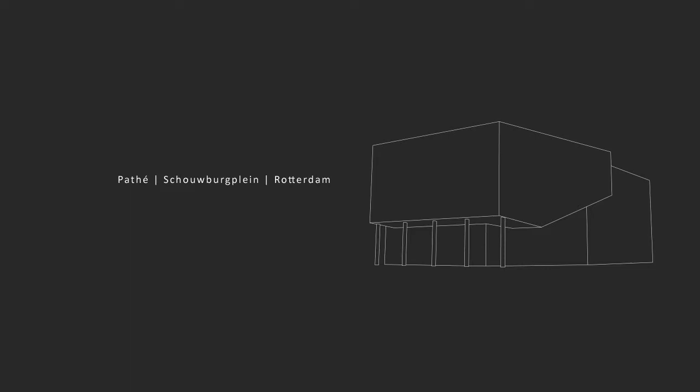The building we have chosen is the Pathe Schouwburgplein cinema building, situated in the heart of Rotterdam. The building is surrounded by the large square named Schouwburgplein and has been a unique landmark ever since its opening in 1996.

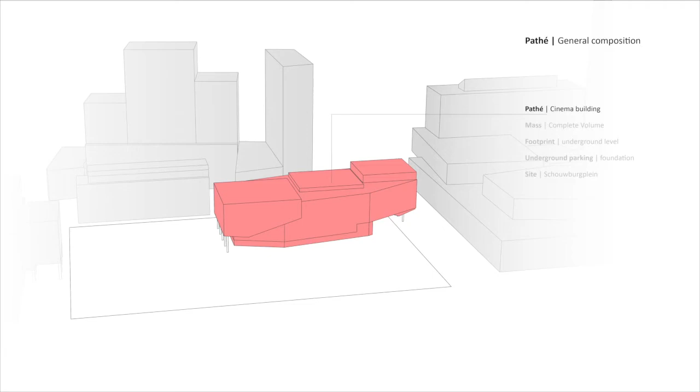Under the entire square and the building there is a parking garage. The building is placed on top of this parking garage, therefore it has been constructed lightweight. The building is composed of a set of large boxes, in which the cinema halls are positioned. These boxes are well insulated and they are standing on a grid of columns.

The envelope is made of translucent PVC panels. It encloses a foyer, which is a large open space connecting the cinema halls. The foyer is a different climate zone.

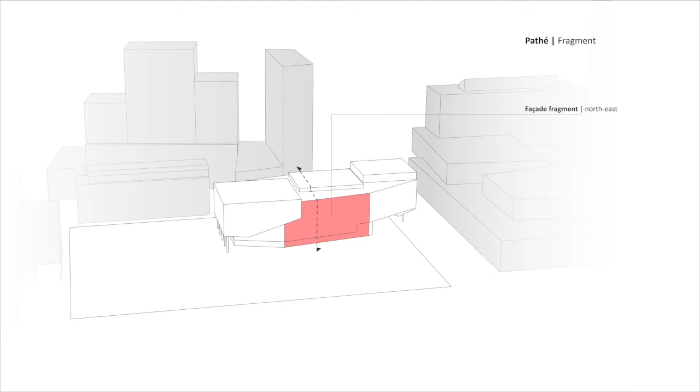We have chosen a fragment of the north-east facade. Our chosen fragment of the facade receives direct sunlight only in the morning.

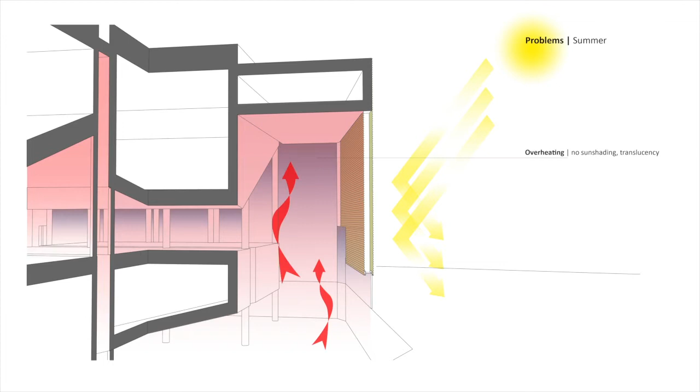After analyzing the building, we have found some problems with the current structure. Due to a very bad facade insulation, the foyer tends to overheat in the summer. And in the winter, the foyer requires a lot of heating due to the large energy loss.

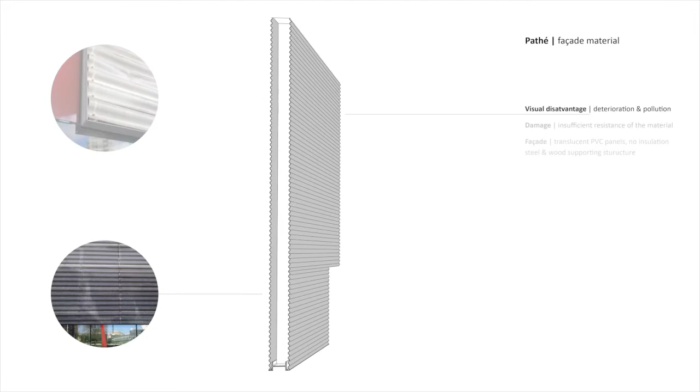The PVC facade has many disadvantages. It's not an airtight facade, filth sticks quickly due to its corrugated shape, and it can easily be damaged.

Can we create a more energy efficient climate system and offer a better climatic comfort for the Pathe building in Rotterdam using an integrated system of a lightweight and transparent double-skin facade which provides sun shading and generates energy?

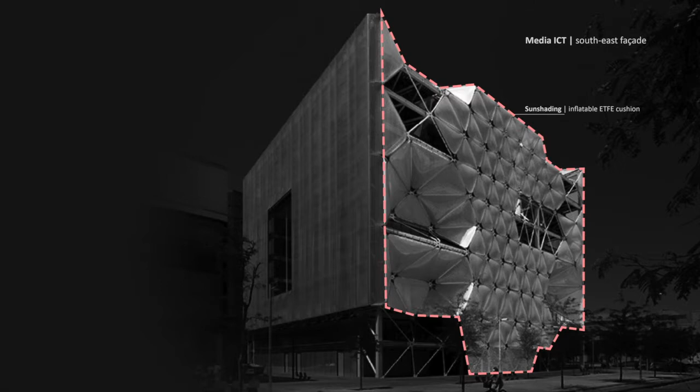Our first reference is the Media-TIC building in Barcelona. We have chosen this building because it has a relatively lightweight double-skin facade. It consists of an outer skin facade of ETFE cushions. It also uses two different integrated systems of sun shading.

In the first sun shading system, cushions with different compartments are used. Onto the inner and outer layer an opaque pattern is printed. When the pressure in both compartments is equal, the patterns will not overlap and the sun can pass through. This can be done in winter. In the summer, the pressure in the cushions can be changed so the sun can be completely blocked.

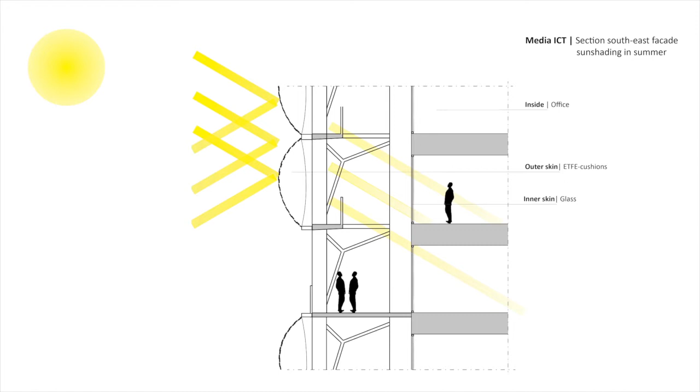The southwest facade makes use of a different sun shading system. In the winter, the facade can be transparent. In the summer, fog can be blown into the cushions, which can block a large part of the sunlight from entering the building.

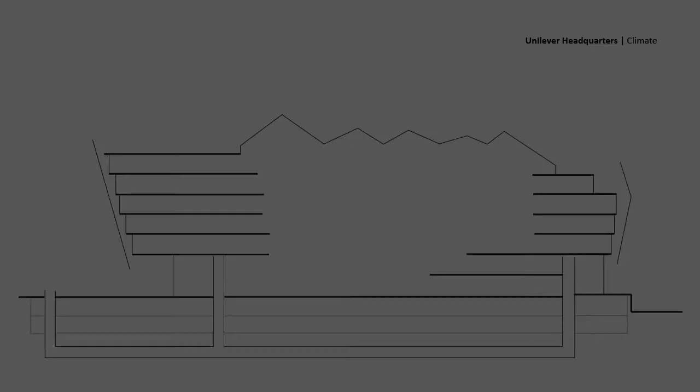The second project we analyze is the Unilever headquarters in Hamburg. We chose this building because of its double-skin facade and its sustainable climate system. In this section we will discuss the climate system.

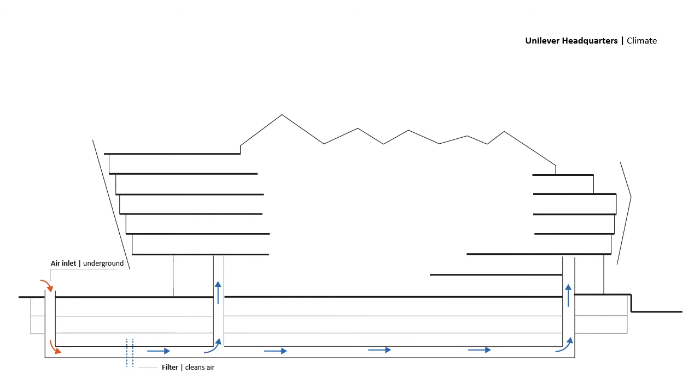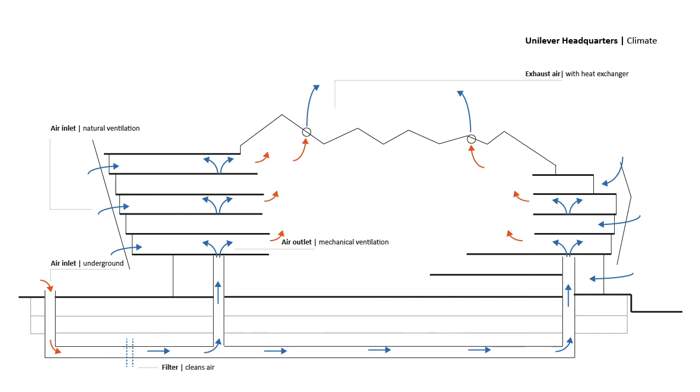An underground air inlet is used to utilize the constant ground temperature to either preheat or pre-cool the incoming air. The air is brought into the office floors mechanically. Windows can be opened to provide some additional natural ventilation. The used air is passed through the heat exchanger in the roof of the atrium.

Now we will take a look at the double-skin facade in detail. The outer skin of the double-skin facade is made of a single layer of ETFE foil. The inner layer is the insulating layer. The outer layer blocks the heavy wind loads, which enables windows to be opened in the inner skin. Sun shading is placed in front of the inner skin layer.

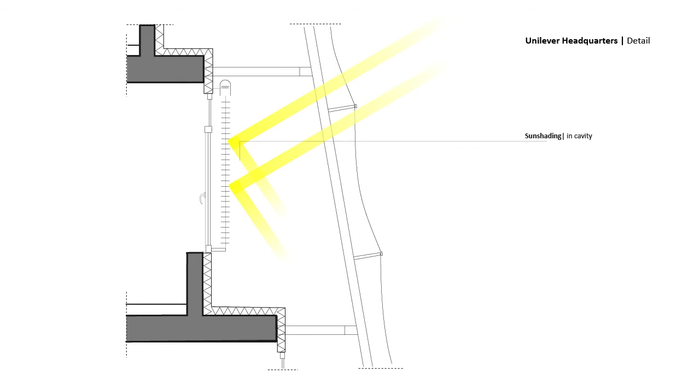Since we have a large square in front of our Pathe building, we will now look at a system that utilizes this large surface to generate energy. In the surface of the asphalt, pipes through which water is pumped are integrated.

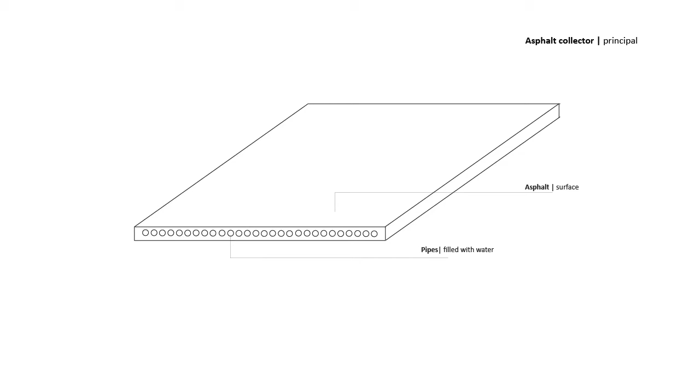In summer, the water in the pipes inside the asphalt will heat up due to sunlight. This warm water will be pumped to an underground thermal energy storage. In winter, the outside air will cool the water in the pipes in the asphalt. This cold water is stored in the underground thermal energy storage as well.

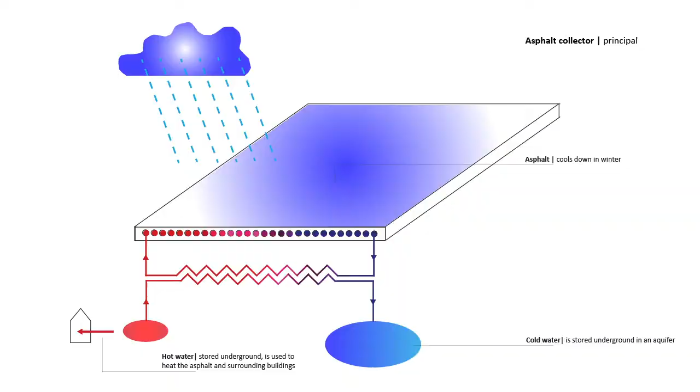The hot water that was generated in the summer can now be pumped up to heat the building. This is our climate system design proposal.

First we discuss the working of the climate system for the summer situation. Continuous lines stand for water flow and dotted lines are air flows.

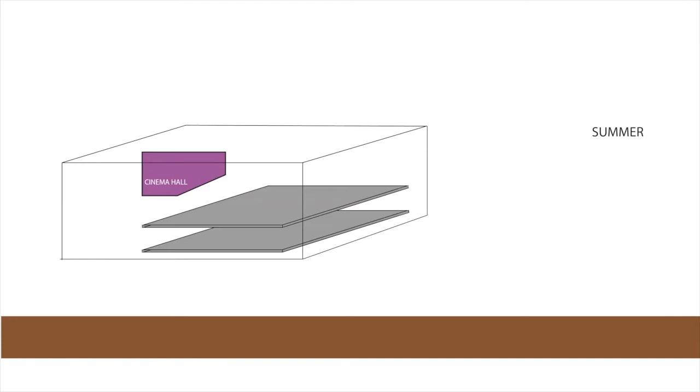In the surrounding square around the building we would like to integrate an asphalt collector. The heat pump is an essential part of the energy flows in the building, regulating the flows by directing either warm or cold, air or water flows inside the building.

Hot water from the asphalt collector can be used to warm water up, which can be utilized for heating the building. It could also be stored to use it later.

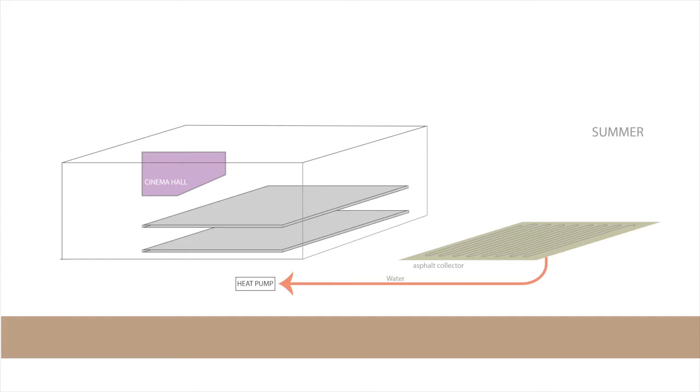The heat pump is connected to an underground thermal energy storage system. These two work together to store excess hot or cold water deep underneath the ground.

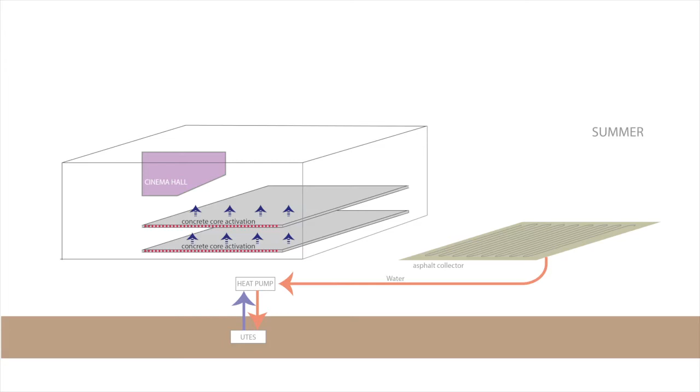The heat pump is connected to pipes that are integrated in the floors of the cinema. Through this concrete core activation system, either hot or cold water can be pumped to heat or cool the building.

For the ventilation of the building, we use an underground air inlet to suck in air through a pollution filter from outside into the building.

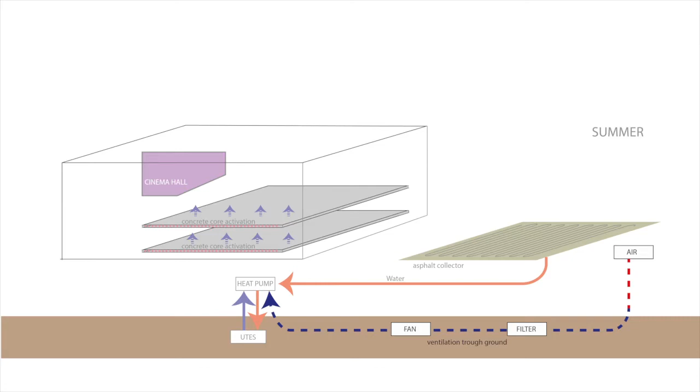By sucking in air underground, we use the constant ground temperature of around 13 degrees to either heat or cool the outside air. The cinema halls and foyer need mechanical ventilation. The air comes from the heat pump.

We use a double skin facade system. The outer layer will consist of ETFE cushions, similar to the southwest facade of the Media-TIC building.

Via openings in the facade, air will flow in between the layers. This air will heat up due to the sunlight and will rise to the top of the facade. Due to the rising of hot air inside the facade, a draft will occur.

This draft will be utilized to naturally suck out air from the foyer. The used air from inside the building is fed through the heat exchanger.

Here the energy out of this air will be exchanged to water, which will be pumped back to the heat pump. This thermal energy can be then reused in the building.

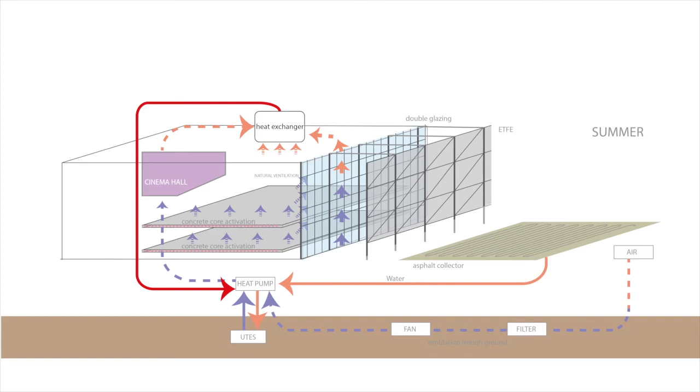This is the resulting total climate system for the summer.

In the winter the system works roughly the same, except that some air or water flows are opposite in temperature. A bigger change, however, is in the double skin facade.

The facade can be closed off during winter, creating a facade that is very insulating. The heat that is still formed at the top of the facade can now be fed into the foyer of the building.

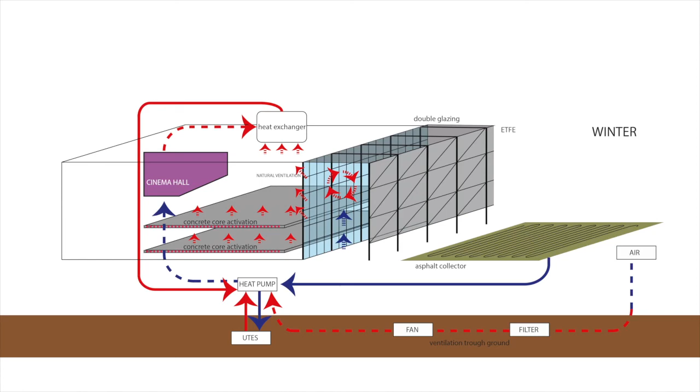The black lines illustrate the systems that are either used for heating or cooling, due to the average temperature in the mid-seasons. The double skin facade is opened and air can now freely flow inside and outside the foyer.

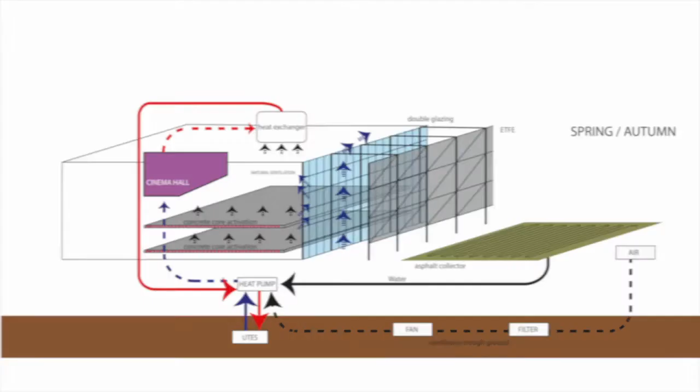For the individual design, I will make a double skin facade with an outer layer of a single ETFE foil and an inner layer of glass.

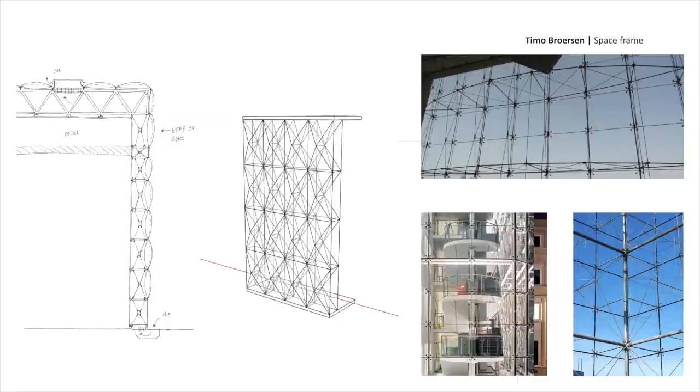The construction will be a space frame of steel cables. In my personal design, I would like to use a tension cable net structure.

This system consists of tension cables to which an outer layer of ETFE cushions and an inner layer of double glazing is connected. This creates a very transparent and lightweight facade.